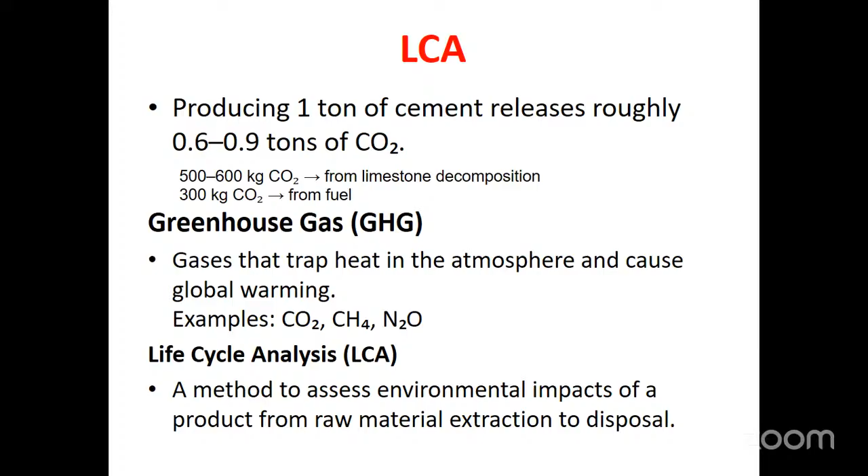So specific to life cycle analysis, this is the method to assess the environmental impact of a product from raw material extraction to disposal. So life cycle analysis is a broad term, but it has connectivity with many sub-terminologies, right from greenhouse gases and different stages of any construction, and how we measure the emission based on the limitation and application, something like the GWP values.

So at this stage, everyone should know about the 3 terms called embodied carbon, upfront carbon, whole life carbon. Because one would like to measure or estimate the GWP values, there should be familiarity about the different stages involved.

In the construction process, right from the raw material extraction till the possibility of utilizing the disposal case, the building, to the new product. I will show this in a later stage with slides, but these three terminologies one should be able to understand.

There are some material-related emissions possible for the material whatever we are using, before construction or after construction, whatever it is, and that is called embodied carbon.

And upfront carbon, it is specific to the emissions before use of the particular structure or building.

And the whole life carbon, it is the total emissions considered for the entire life cycle of the building, right from the raw material extraction to the overall disposal.

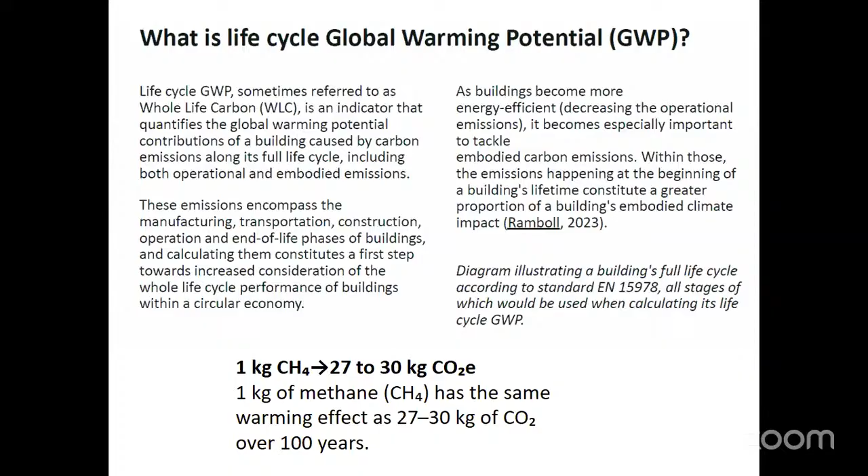With respect to CO2, we just measure the remaining, or whatever material you would like to measure the emission, to calculate the GWP values. So here, the emission factor, I can show in subsequent slides, becomes an important role here.

This is the area in which one can prove that the circular economy of the particular building is being satisfied after the successful recycling of the demolition material, for example, recycling of the concrete or recycling of steel or any other materials.

So what is the connectivity between this, our SDG, Sustainable Development Goals, and LCA, Life Cycle Assessment? There are 4 goals I am able to connect to it.

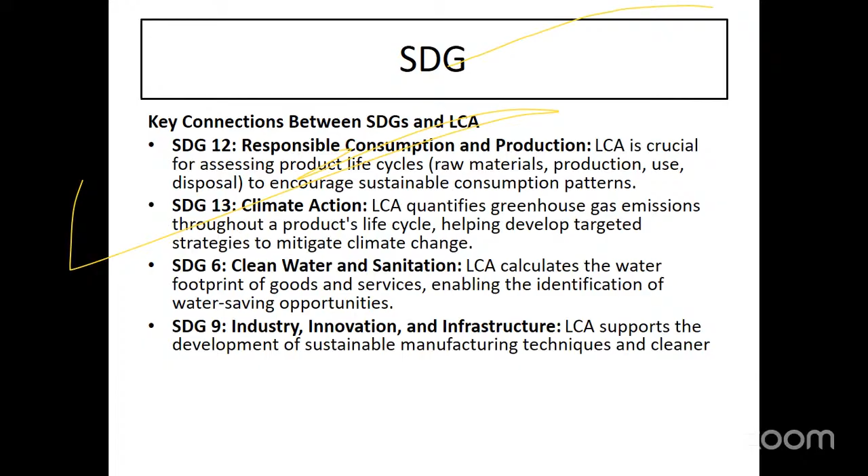And whatever I have shown here, the same SDG connects to this entire process. The overall life cycle assessment, as earlier explained, starts right from resource extraction to material processing. But according to your interest or practice, this process can be modified a little extra, and it can be fine-tuned with subdivisions also. It is not only specific to concrete alone - there is transportation, use, end of life, and again recycling.

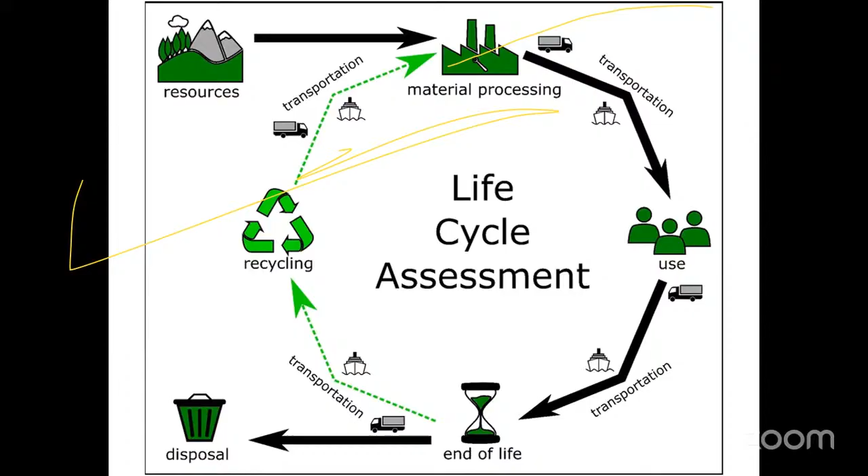So here, the building life cycle whatever I have shown, it can again be given in terms of embodied carbon. We have operational carbon, and again embodied carbon - completely the total, overall we call it whole life carbon.

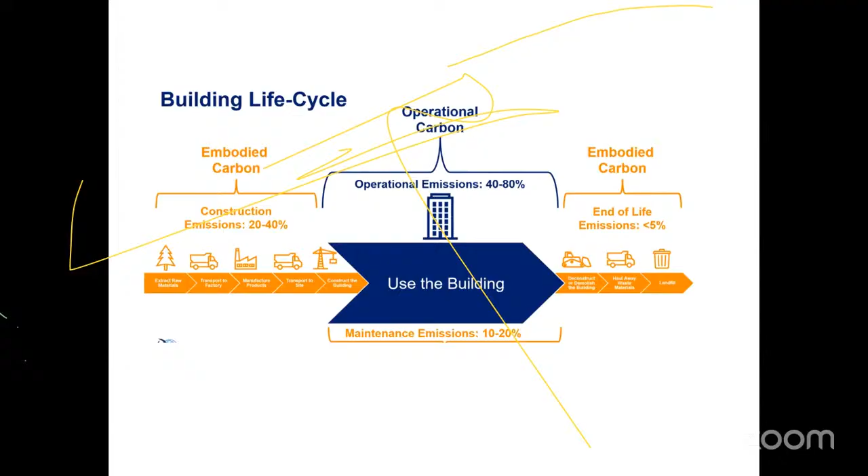So in this case, there is an important stage called the embodied carbon upfront stage, whatever I have told. It is around 20 to 40% emissions we can see. And in the operational carbon stage, the emissions - this is some approximate percentage only - however it ranges between 40 to 80%, including maintenance emissions of 10 to 20%. The end of life stage has less than 5%.

So before we move to the next terminologies, there are three types of terminologies I would like to introduce here. One is the cradle to cradle approach. So here, if someone is interested to go for a life cycle analysis process, there are three stages whatever we have already seen. It can again be connected with these three methodologies - the approach is cradle to gate type, cradle to grave, and cradle to cradle type.

Just remember the same methodology whatever we have seen earlier - the emission stages A1 to A3 come under the production stage. That emission stage is connected with the cradle to gate approach, because the particular product is being manufactured and delivered till the gate of the factory. So this cradle to gate approach is limitedly applicable till A1 to A3, and the carbon category coming under is upfront carbon emission, that's what we have seen earlier. What it represents exactly is the carbon emitted before leaving the factory, because it is not yet being utilized or in the use stage. An example in a concrete slab is the cement making process, aggregate processing, or batching, whatever it is.

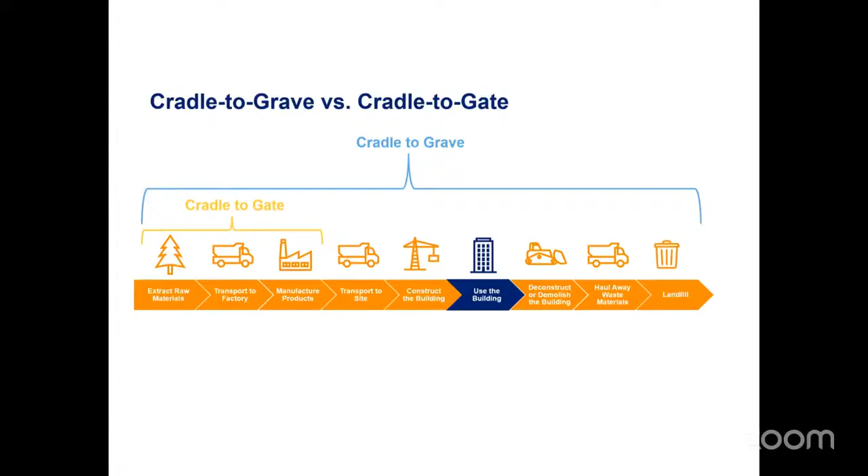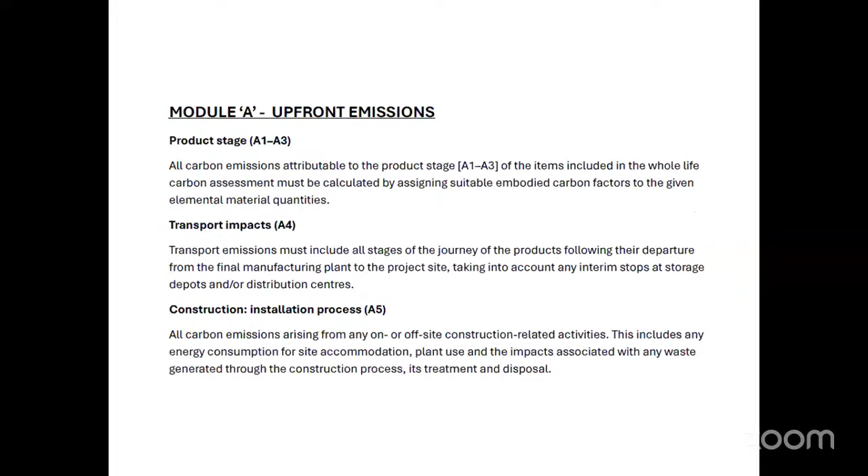So that's what is shown here as a cradle to gate approach, the first three processes, and starting from the end, it can be considered for cradle to grave approach. And once it is proven for recycling and remanufacturing or reuse, then it comes under the cradle to cradle approach. So this is the same definition we have already seen.

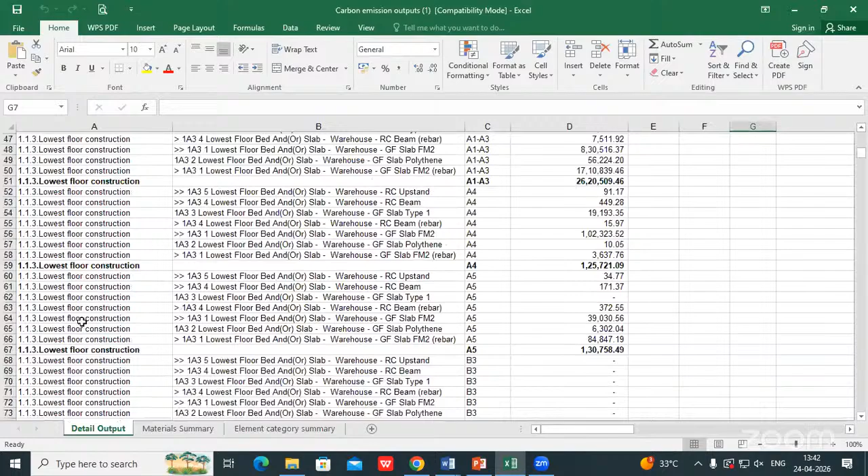For example, it consists of several foundations and floor constructions with many elements, which stage is being considered and the corresponding emission kgCO2 equivalent values. And this is the summary, maybe for an overall building, floor wise, element wise. We are able to see the different stages, what are the GWP values, right from A1 to C4. So it doesn't mean that all the elements or whatever particular description you have taken should contribute in all the stages. There are some applicable stages, and there are some non-applicable stages also. So the final outcome will be like this.

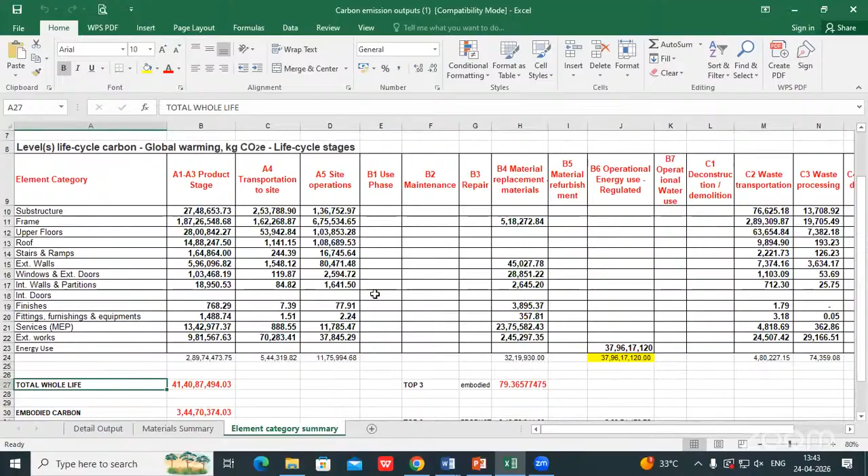Someone is calculating element category for a particular building. A1 to A3, what are all the GWP values element wise? It is inclusive of A4, A5. Here I am not interested in calculating B1, B2, B3, B5, B7 because they are not relevant from a civil engineering point of view. But anyway, it is the contribution of many engineering professionals. So once it is calculated, then we are able to categorize it according to our requirement, because we have got the split up of stages like total whole life carbon also.

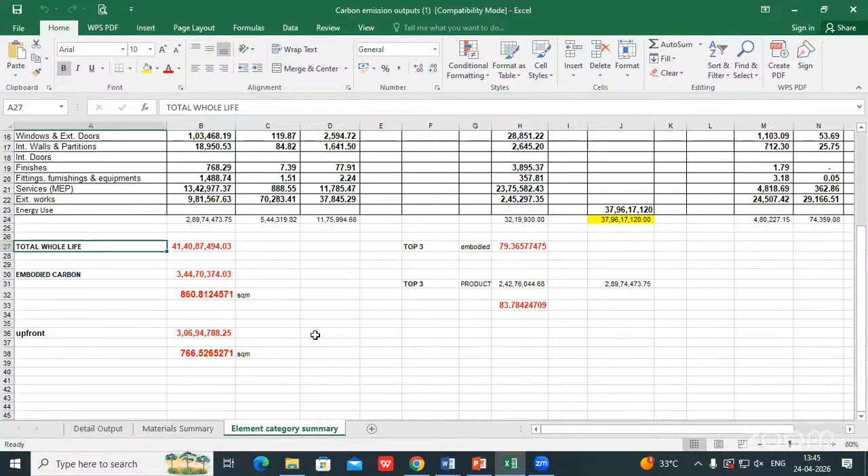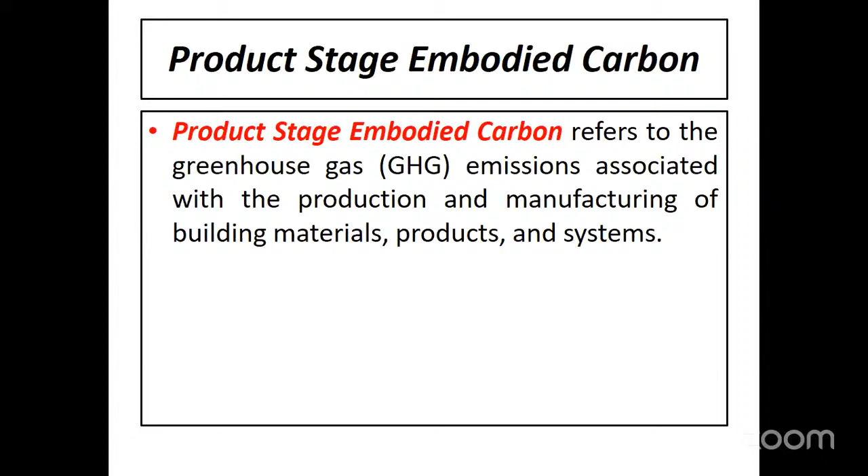So that we can work in stage D or for further improvement. So this breakup will be helpful to analyze the exact effect of GWP on the product efficiency. A product system or process throughout its entire life cycle. So for the majority of people, the outcome is the whole life global warming potential because it starts from the raw material extraction to end of life, and the whole life embodied carbon, that's what I have already explained, and product stage also explained, and upfront.

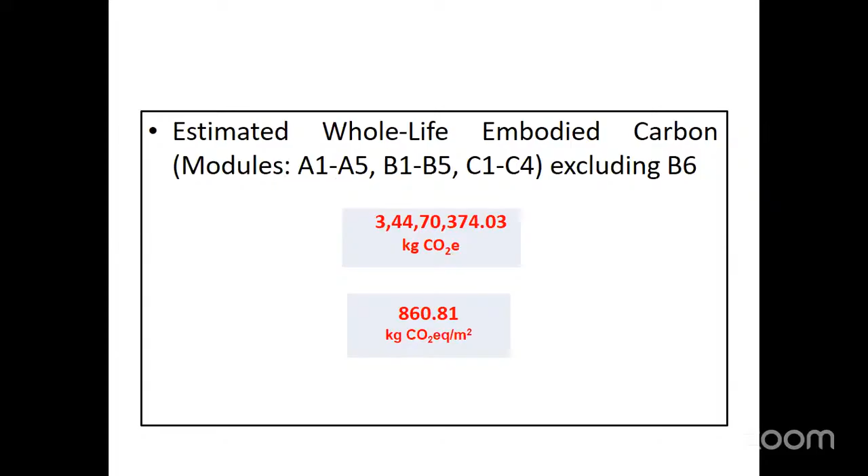So here I am giving the answer for whole life. For example, the final outcome value will be like this because it is inclusive of the stages A1 to A5, B1 to B5, and C1 to C4. The estimated whole life embodied carbon, excluding B6, is this much GWP, and if I divide by floor area, this much kg CO2 equivalent per square meter. And now we are able to compare the contribution, what I said, based on material point of view emission or process point of view emission or operation related. So we are able to compare the percentages also.

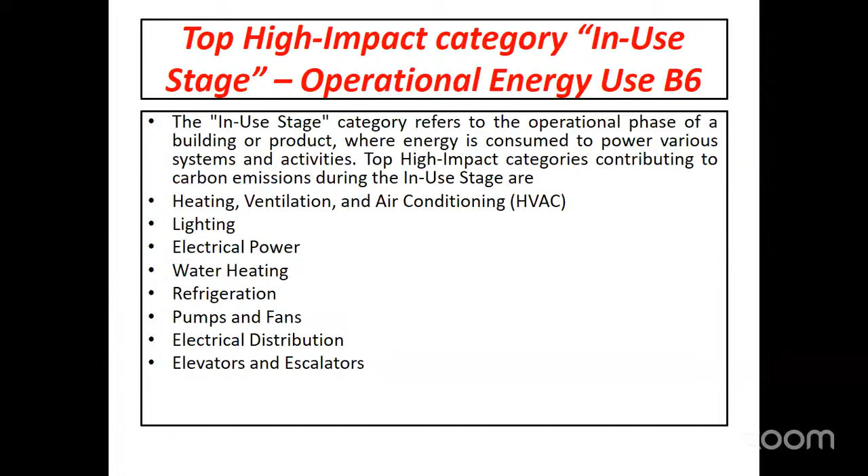But this B6 stage is the top high impact category in the use stage. The operational energy and operational water come under the use stage. And these are all the exact issues like heating, ventilation, and air conditioning, lighting, water heating, refrigeration, pumps and fans. Industrial buildings and commercial buildings may have a lot of impact in this stage.

So another particular terminology one should be able to understand is environmental product declaration, because to calculate GWP value, definitely we need this emission factor, because the emission factor is going to vary because there are a lot of dependent parameters in emission factors. The emission factors are changing product to product. One can calculate the emission factor with our own understanding also, or it can be referred from any literature, or there are a lot of guidelines available. There are some standards also available. There are many softwares also giving these EPD values.

This is a standardized and independently verified document that reports environmental impact. Nowadays a lot of manufacturers are giving this emission factor value so that we can understand what is the exact sustainability of that product. It's based on principles of the International Organization for Standardization. And what does this EPD include? It is a data sheet. It has got raw material extraction, water consumption, emissions data, waste generation, and end of life disposal or recycling details.

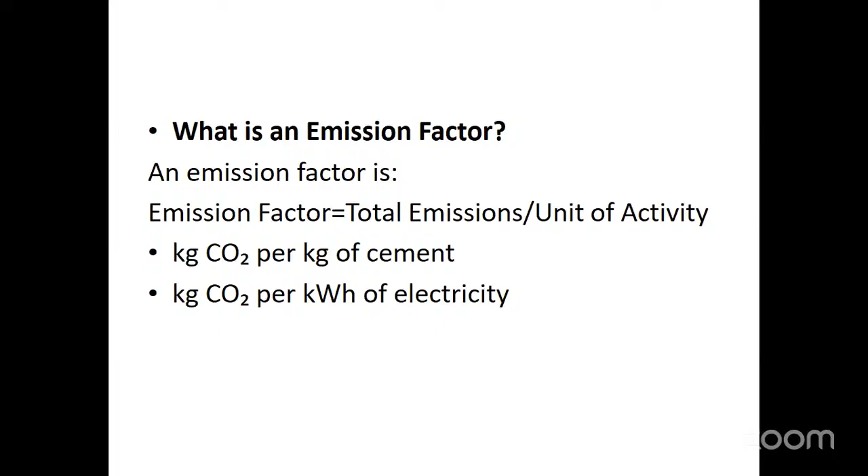So what is an emission factor? This emission factor is calculated using the basic formula: total emissions divided by the unit of activity. For example, for a concrete engineer, simple to understand, someone interested in GWP calculation, the unit is kg CO2 per kg of cement. And if it is electricity related emissions, then we say kg CO2 per kilowatt hour. Transport related emissions are also available. For example, fuel-based emission factors are used for fuel, because in all the raw material extraction and transportation processes, we have the utilization of diesel or any other fossil fuel.

So in case we use diesel or petrol, whatever it is, the kg CO2 per liter value is 2.6 to 2.7. And how it is being utilized in GWP calculation, you can see in the coming slides. And the electricity emission factor is also equally important. It depends on how electricity is being generated, whether it is coal-based or renewable-based. So here the value will be like 0.7 to 0.9. These are all some samples; it is going to vary based on the specific type of project and dependent parameters.

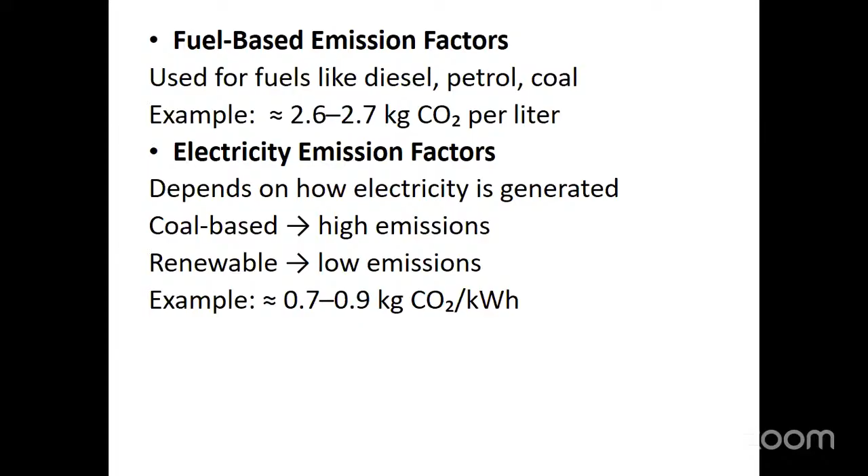Example for material-based emission factors: cement 0.8 to 0.9 kg CO2 per kg, but it is not a constant value. If I am using ordinary Portland cement, it is different. Slag-based cement may be different, pozzolanic added cement, PPC, will be different, or geopolymer-based cement will be different. For steel and concrete, the values are like this. In case of concrete production, for example, I have a cement emission factor with OPC value 0.9 kg CO2 per kg of cement. In case I'm going to use M20 concrete with 300 kg, then the final value will be 270 kg CO2 equivalent.

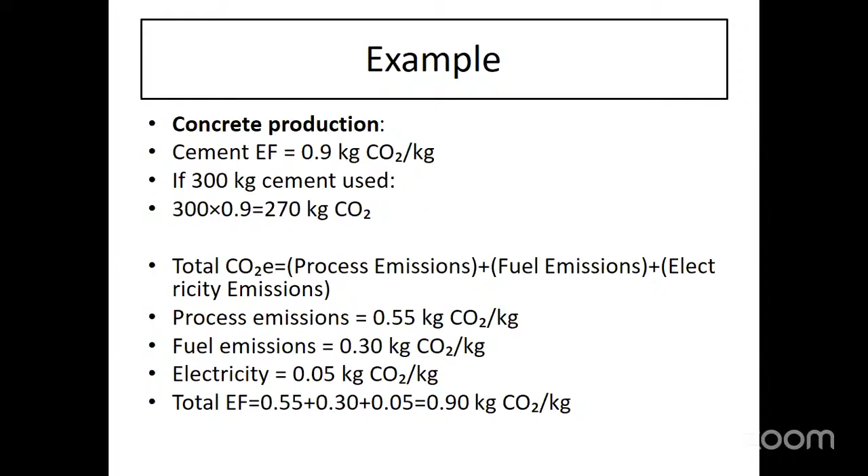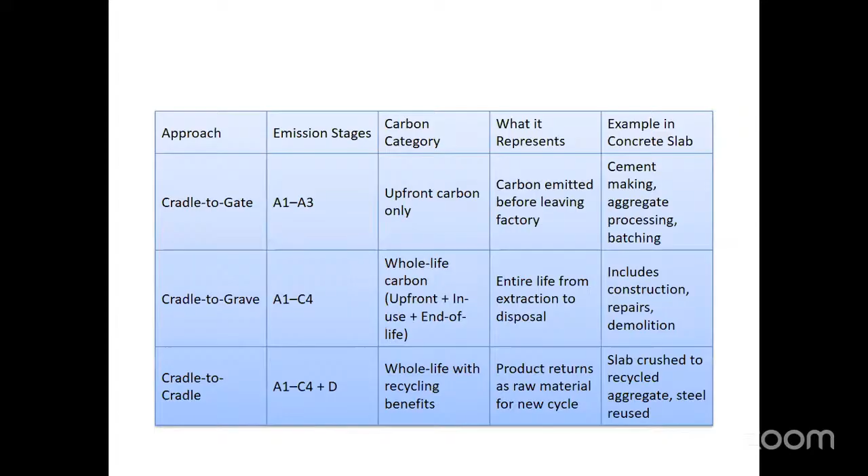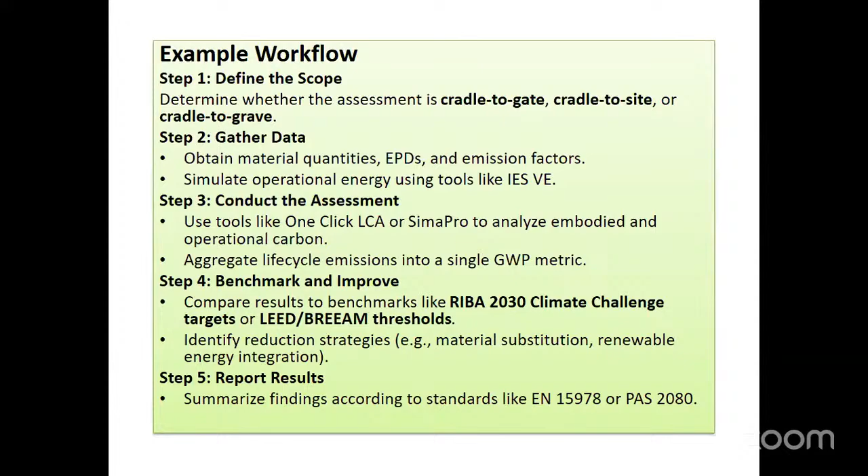So the total carbon emission is the combination of process, fuel, and electricity. Altogether it will be added and used for the analysis. These are some of the standards and methodologies that can be referred, related to ISO standards, to know about frameworks of LCA, environmental performance and energy management. So to perform this cradle to gate, cradle to grave or cradle to cradle approach, there are a lot of open source softwares available with some limitations. Like One Click LCA, it is the famous software, and a lot of analyses are done with it, because the advantage is the emission factors for different products, the EPD values, are inbuilt. Some of the softwares we have.

So here, what is the connectivity with climate impact of buildings, specifically for civil engineering? Buildings contribute 30 to 40% of global CO2 emissions. So that is the major factor here. And concrete is the major contributor due to cement production. So that's what we are specifically interested in: concrete, steel, brick, their utilization and the relevant product as well as process till the end of life. Other than that, you have the remaining operations like mechanical, electrical, plumbing, and other operational carbon emission related activities. So finally, it is high embodied and operational carbon.

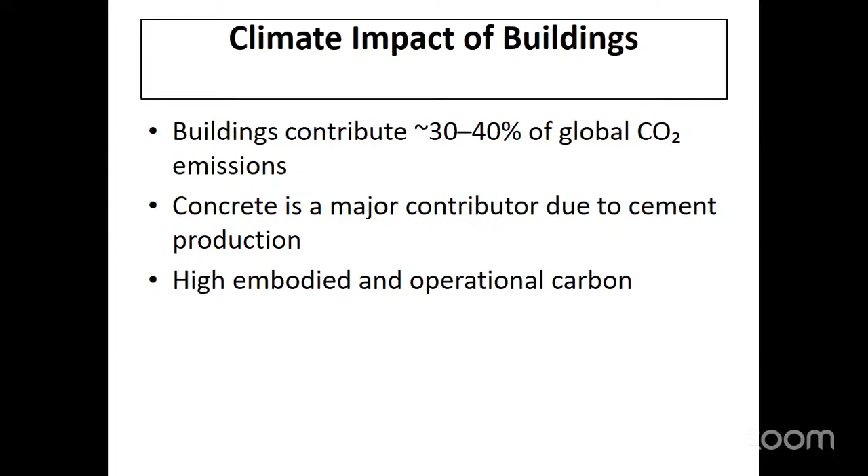So finally, how to improve LCA through material and construction methods. That is going to be important, because this is again connected with IGBC certifications and getting a rating for a particular building. So the first one is sustainable materials. Everyone knows a lot of researchers study the possibility of using recycled materials and choosing low carbon materials, because the Indian standard IS 456 is being revised, and soon we are going to get the new 456 emphasizing durability related designs and using low carbon materials, with utilization of slag based cement, and we started using almost 50% slag replacement.

The revised IS 10262 gives the optimum content also, and utilization of pozzolanic based cements also, using geopolymer concrete for precast products. So like that, this process can be better enhanced. So preferable renewable resources, locally sourced material also will be contributing.

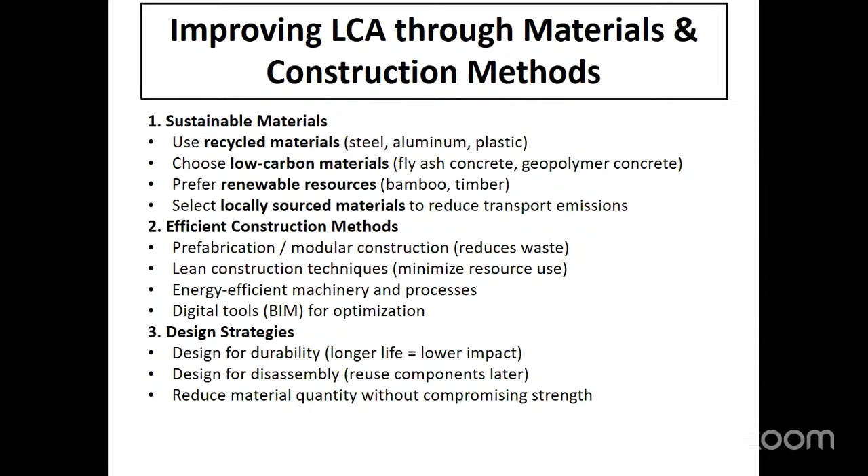Because if I don't use the appropriate grade of concrete for the particular exposure condition, I'm not able to plan the water cement ratio, minimum cement content, then cover. So like that, a lot of interrelated parameters are directly connected with design for durability, then we are missing certain things in enhancing the life cycle assessment process.

And exactly speaking to SDG 12 and 13, the exact problem is utilization of OPC and natural aggregates, resulting in embodied carbon and limited recycling. Mainly the clinker: the higher the utilization of clinker, the higher the emission, and this can be overcome by these low carbon materials, recycled materials, and efficient design.

How exactly is SDG 6 connected? The problem is excessive freshwater use, conventional curing methods, untreated wastewater discharge. I hope the revised guidelines in IS 456 prefer treated sewage water based on CPCB guidelines. If it is certified, you can use it for curing and preparing the concrete.

So here the improvement is water efficient concrete, like use of appropriate admixture to reduce water demand, and optimum mix design. And alternative water resources like recycled or treated water.

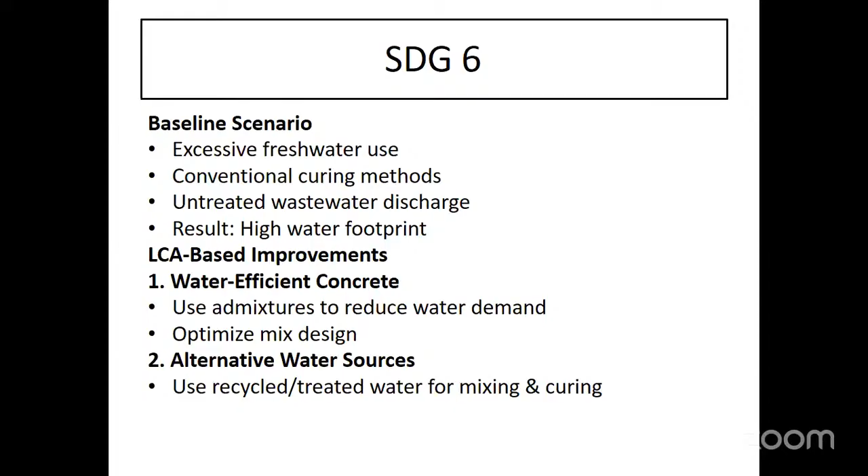How exactly is SDG 9 connected here? It is the conventional construction practices. As I said earlier, avoid plastering or use the precast method. These are all going to be the future trends, like using advanced materials. So the combination of pre-stressed precast with high strength concrete is nowadays preferable, and self-compacting concrete and geopolymer concrete.

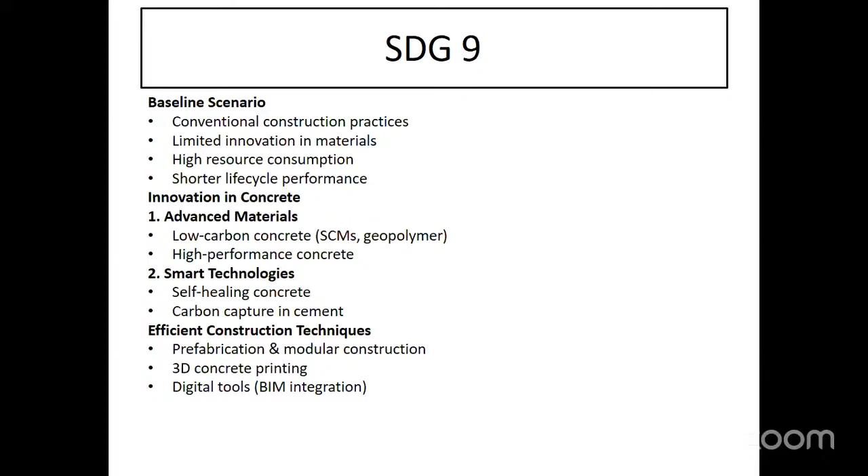There are some smart technologies to improve the performance by some innovation for a particular building, like a green building and smart building. Where possible, people can use 3D materials, nano materials also, wherever needed. Some small efforts can make some bigger changes in this life cycle enhancement.

And for conclusion, some points I would like to cover here. It is deemed to satisfy rules. Those who are familiar with the deemed to satisfy rules know they are governed in many guidelines, many code books. For example, in IS, the deemed to satisfy rules related to durability range from cover, minimum grade of concrete, minimum cover, maximum cover, as well as minimum reinforcement, maximum reinforcement, minimum cement and maximum cement, admixture utilizations, and optimum water cement ratios.

If someone is familiar and good enough to practice this, then the deemed to satisfy rules are covered and better sustainability can be achieved. So that will be the biggest advantage, and it is going to contribute in the production stage, the use stage, as well as the end stage. And it is followed by design for durability norms. That's what I have mentioned here.

And ultimately, by following this, there will be no corrosion. For example, in India, if we take most buildings, there is corrosion because the deemed to satisfy rules are not being followed.

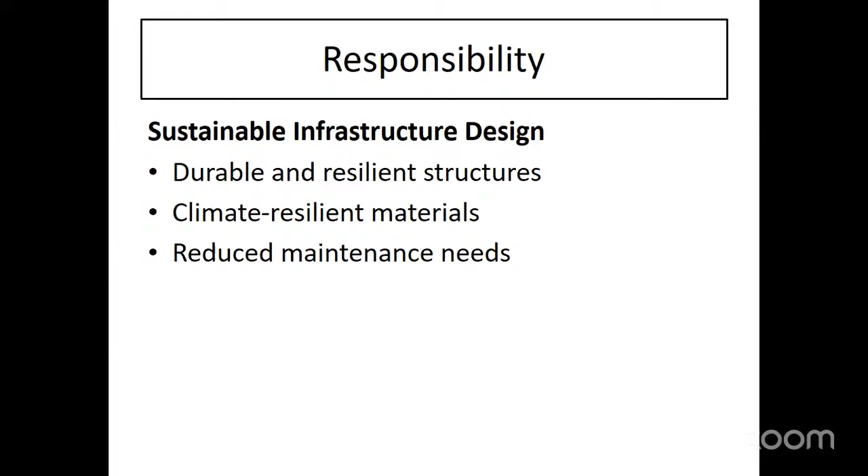This itself is contributing to the Indian economy, because there is a lot of insufficient planning, construction and design—a lot of corroded buildings. Randomly we can see this in public, residential, and commercial buildings. There are many reasons behind this that can be discussed under some other title. We can see corrosion cracks, and if we cut any bar, there is insufficient yield strength—so there is a lack of life.

If the building has to survive for at least 70 years, during 30 to 40 years in between we should be in the stage of repair and rehabilitation. The reasons may be many—carbonation, chlorination, or improper waterproofing, whatever it may be.

This is the case study, exactly connected with life cycle assessment. You cannot directly go for life cycle assessment unless you know the reality of the building—how it is designed and how it performs. Then you cannot directly incorporate a particular case with life cycle assessment.

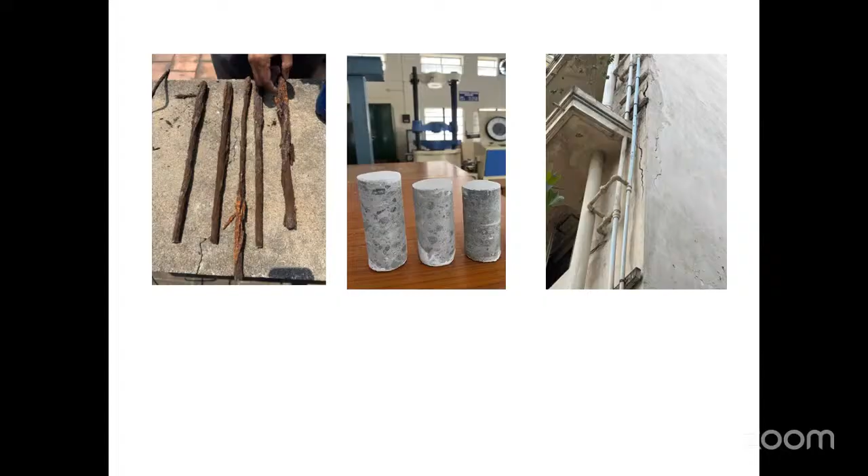So here are the exact problems I would like to show. In most of the roofs we see dummy columns—there is no proper structural concrete. The reinforcement starts from here.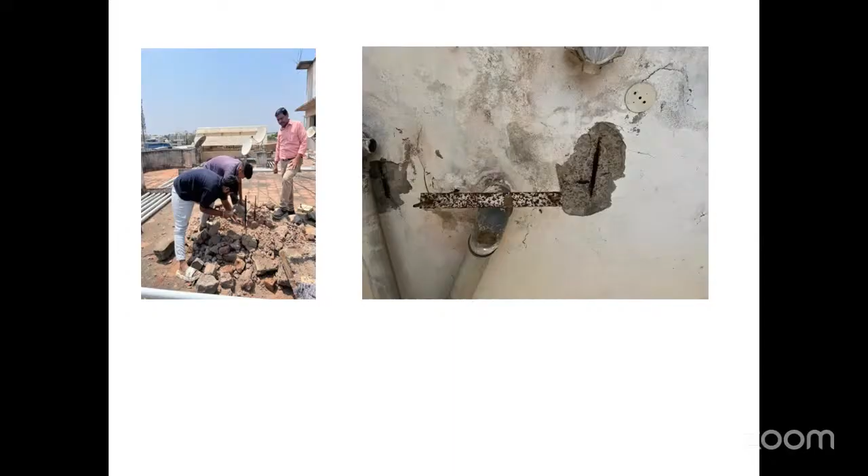There is a possibility of going for geopolymer concrete and a no-clinker concept, at least for small buildings, wherever possible. So we could construct a geopolymer-based cementless concrete block with the CSR fund, which I would like to show here. These are some introductory thoughts—if you have any clarifications.

I hope I am audible, right? Yes, sir.

So I have some questions here, so people can answer, just to refresh you on whatever we have seen. It will just take 5 minutes, based on the slides I have prepared.

Can LCA be used to assess environmental impacts of building retrofits? Any specific answers? So here the LCA can account for emissions during renovation and refurbishment also.

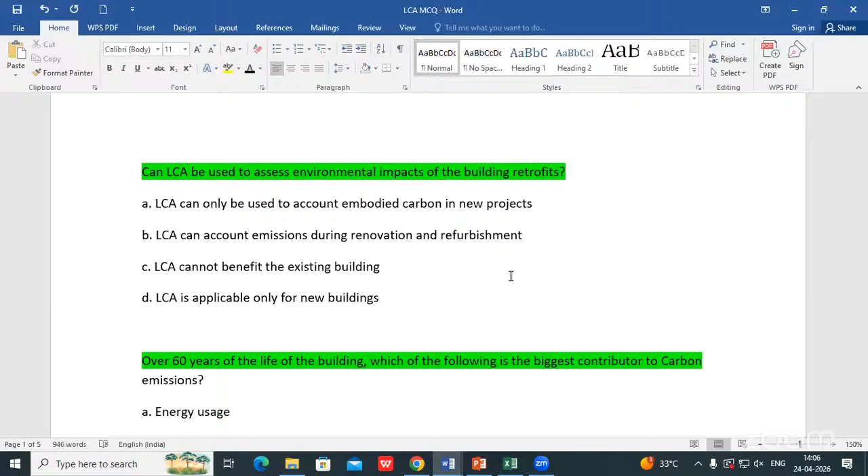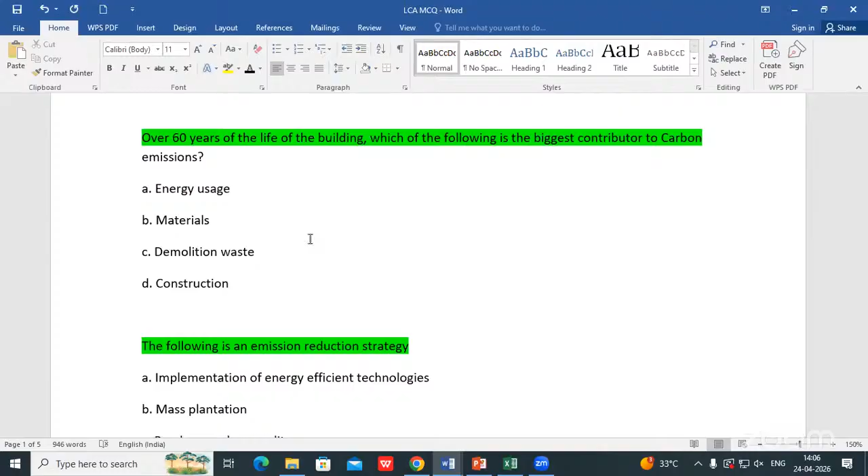Over 60 years of a building's life, which of the following is the biggest contributor to carbon emission? Energy usage—yes, energy usage. So though we are mostly concentrating on civil engineering based material, energy usage is going to be the biggest matter.

And the following is an emission reduction strategy, out of four. So the implementation of energy efficient technologies contributes more here.

The following is an approach to reduce environmental impact during construction. Because the IGBC guidelines are connected here—use of local materials, it is very good. You need not always plan for clay brick; the immediate mindset may be clay brick, but we have alternate types of bricks also.

Which of the following standards cover LCA studies and LCI studies? So ISO 14040—it is a very good ISO standard.

And which of the following are included as the upfront embodied carbon in a building's life? I have told earlier only about upfront embodied carbon—it is manufacturing, transportation of products, and construction.

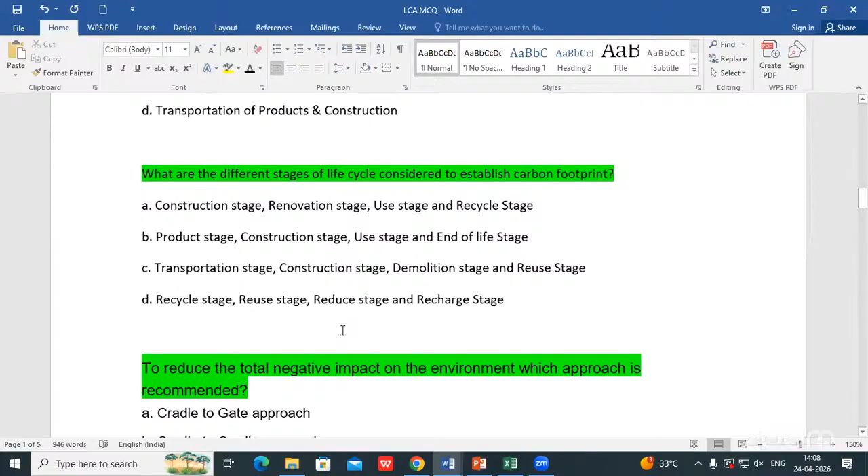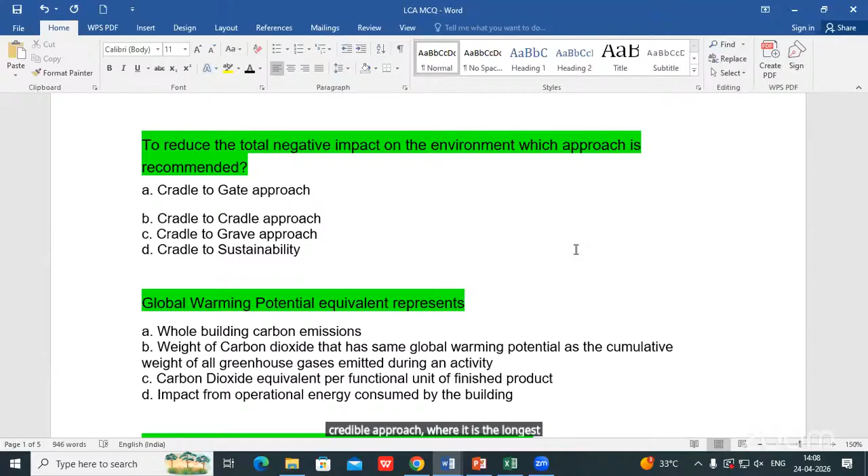To reduce the total negative impact on the environment, which approach is recommended? So cradle to cradle approach—that is the longest cycle, in which you have to work for a better recycling product.

Then, what does global warming potential equivalent actually represent? It is the weight of carbon dioxide that has the same global warming potential as the cumulative weight of greenhouse gases emitted during an activity. So that is B.

A unit of kg carbon dioxide per kg emission is used to express exactly the material emission, so carbon emissions.

Which of the following is not a part of India's commitment at COP 26? You can refer this. This is interesting: by 2030, 50% of the energy requirement by renewable sources. We'll see whether it can be achieved.

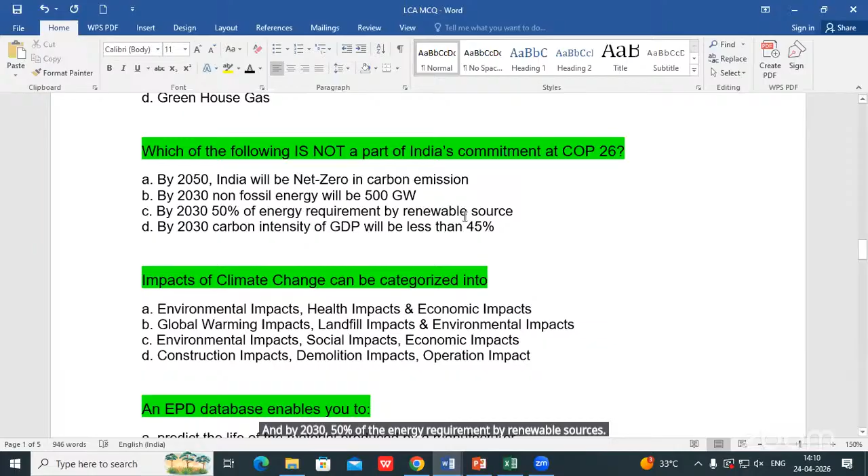The impacts of climate change can be categorized into environment impacts, health impacts, and economic impacts.

An EPD database enables you to access the LCA data of a specific material produced by a specific manufacturer.

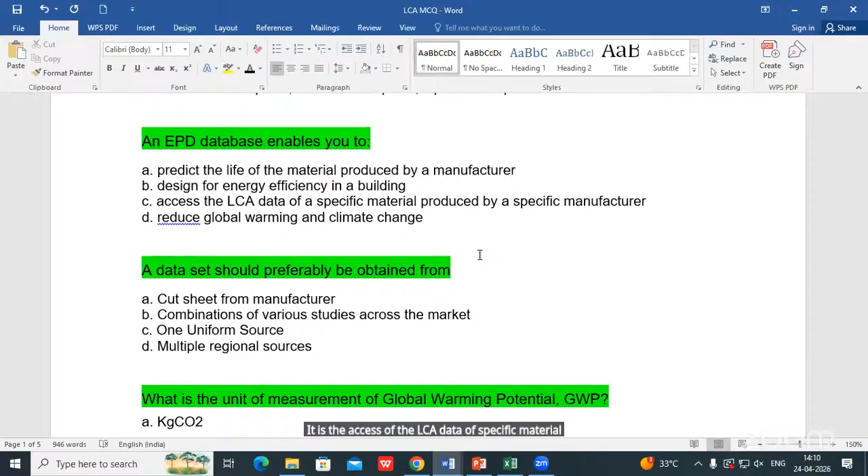A data set should preferably be obtained from one uniform source so that your result will be acceptable.

What is the unit of measurement for global warming potential? What does it denote? It is kg CO2 equivalent.

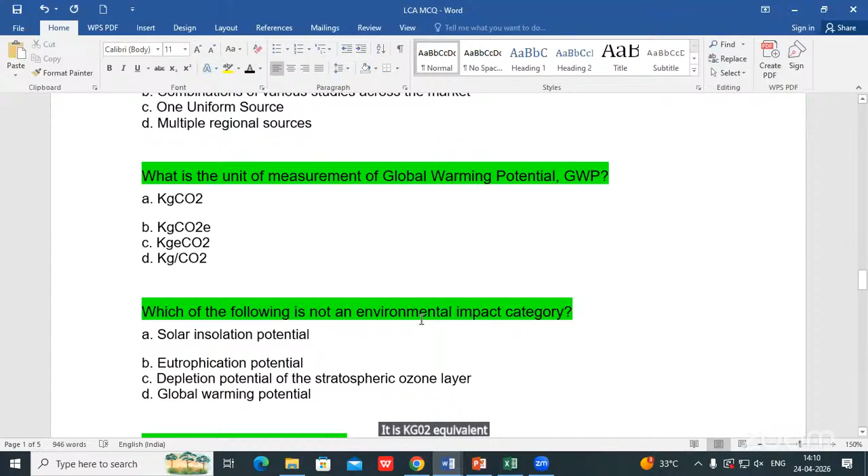LCA study can be adopted to create discipline in the design approach.

Embodied carbon is the result of demolition of buildings and recycling of materials.

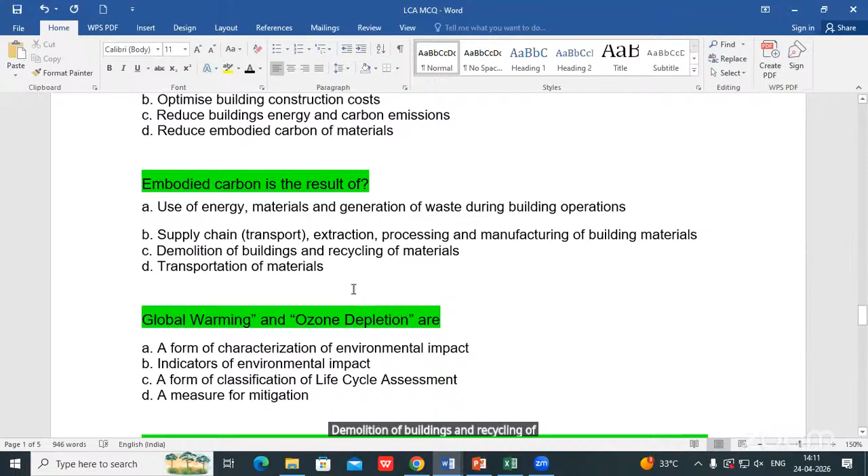Global warming and ozone depletion are indicators of environmental impact.

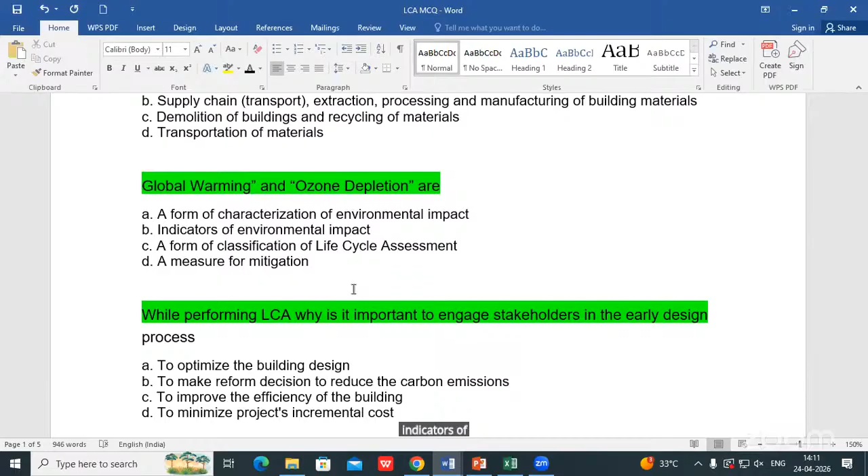While performing LCA, why is it important to engage stakeholders in the early design process? Because it is important to work all together as a team, right from architect to construction engineer, as you have to optimize the building design.

Which of the following measures can help cut buildings' embodied carbon? Only the embodied carbon—which measure will be helpful? Use low carbon structural materials and sustainable products as much as possible.

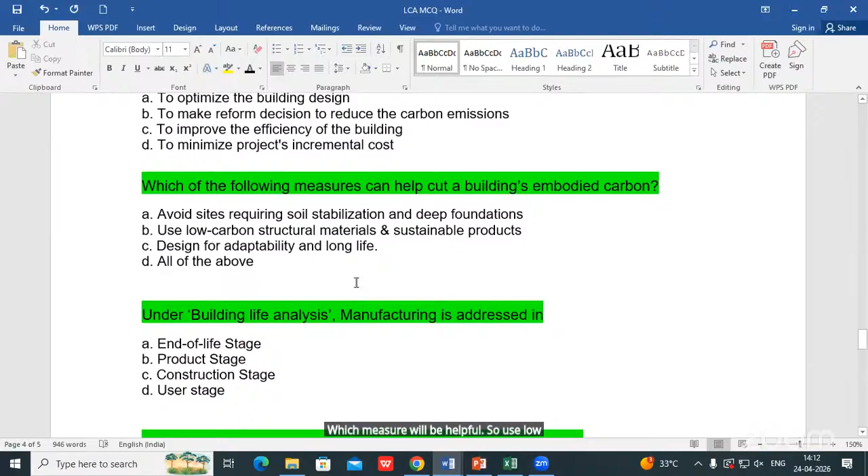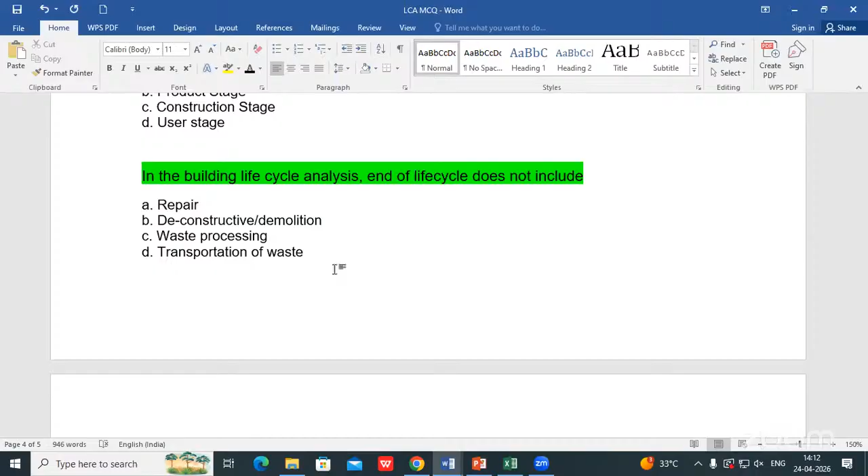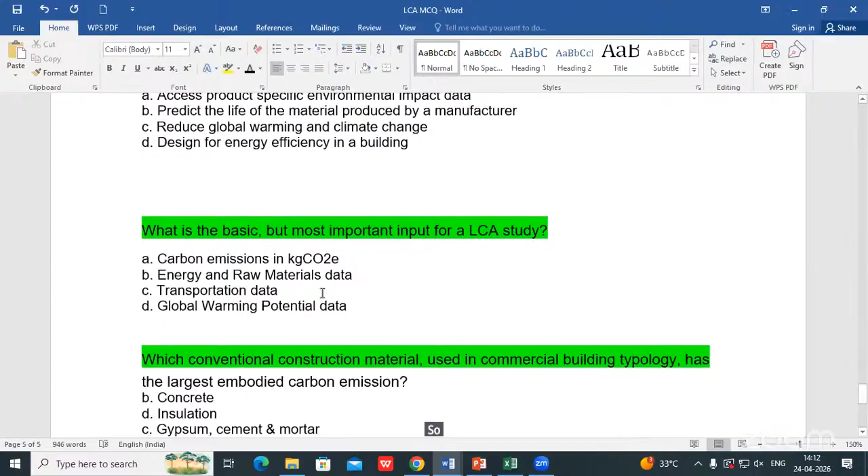Hello, sir. Yes, do you have any clarifications?

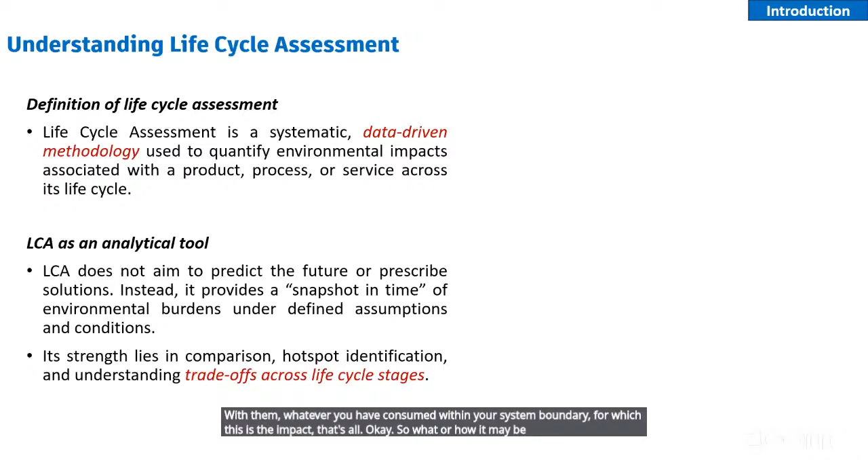So how is LCA helpful? It will be very helpful in trade-offs across the life cycle stages. So what is meant by trade-off? We have life cycle stages, everybody knows the typical life cycle stages for LCA assessment.

We have raw material extraction as a stage, production as a stage, packaging distribution as a stage, downstream logistics as a stage, use and maintenance, and finally disposal, and thereafter some recycling. So everything is individual stages.

When you perform LCA covering all these things, you would understand where you can really react or where you cannot react. For example, take distribution, downstream transportation. In life cycle modules, it is called A4, downstream distribution. The downstream distribution is not in your control.

You cannot change anything there, but you understand the downstream impact comes around 300 kg CO2 equivalent as global warming potential. I understand that's a very big number, but I cannot react there. Whereas I can look into other areas. Let the downstream transportation be the hotspot, but let me focus on other areas because in that hotspot I don't have control.

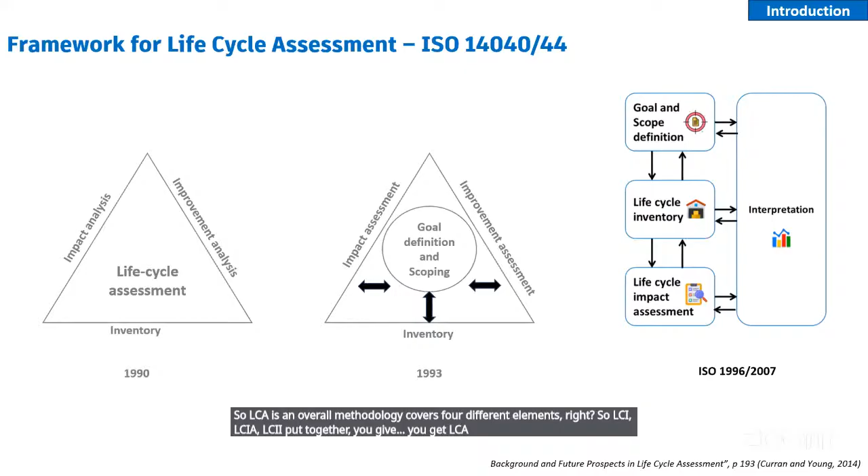Since 1996, then amended in 2007, since then till now - and I can say forever hereafter - this is the same framework which is going to exist for LCA.

As a consultant or practitioner who wants to perform LCA, you just need to learn what is given in ISO 14040. That's a document of some 11 to 15 pages. After reading that, you would understand what these 4 stages really indicate. That is the prerequisite.

Once you read this, you need to go into the detailed guidelines given by ISO 14044. That will be around 80 pages document.

If you want to kickstart your LCA journey, no matter if you are a student, research scholar, or faculty - because I am very much aware that these days, no matter to whichever journal you want to submit your article, they want you to perform LCA, any authorized environmental assessment. So LCA is inevitable for all stakeholders.

So learn these two documents. 14040 you cannot pirate from the internet. But 14044, the Indian government has launched its own version, available on Google for free. Please take that 14044, download it, take a printout, and read it.

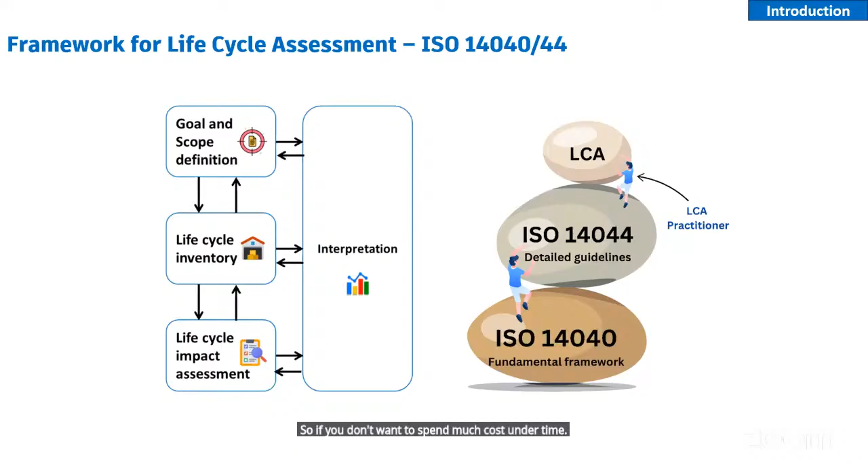So impact measurement - when we say impact measurement, we have approaches or perspectives. Especially belonging to a construction profession, we have certain classifications which don't apply to any other sector. If you belong to electrical, electronics, or any other production sector, you don't have this kind of classification. But since you belong to construction or civil, you should know about these perspectives.

So first, we have the perspective of measurement of impact, either on the basis of carbon or on the basis of a full set of environmental spectrum. When we say carbon footprint as an impact measurement, it will be about only a single indicator, GWP. It will answer how much this contributes to climate change, that's all.

So what standards are available? ISO 14067, GHG Protocol, and PAS 2050. They are very fast - you can find lots of free and open source online tools, called carbon calculators, and make use of them. The result of carbon footprint will pave the path for your full level LCA. So that's your entry level.

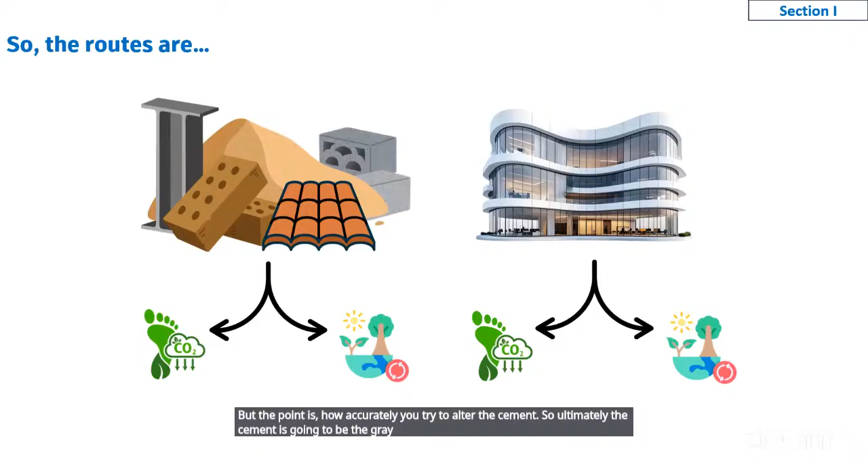So cement we cannot leave out because we need cement. But the point is how accurately you try to alter the cement. Ultimately the cement is going to be gray - when we say gray, it holds both goodness and it also has its own badness. So it is going to be gray anyway, but people will not give up.

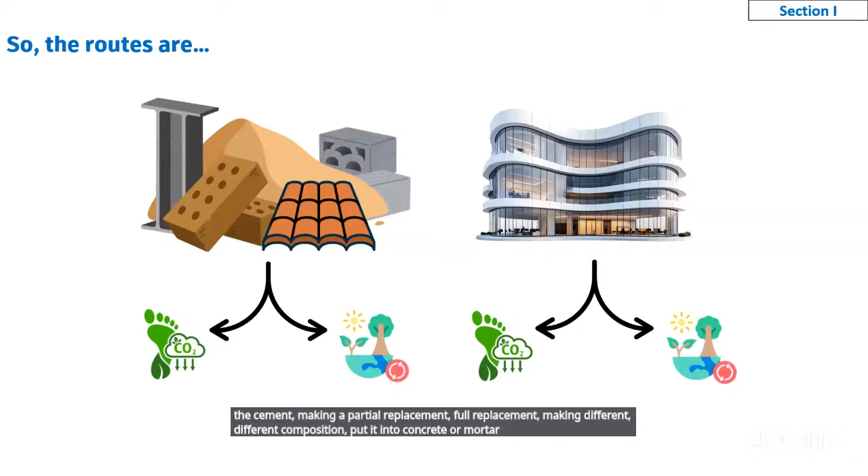So they will keep on putting something into the cement, making a partial replacement, full replacement, making different compositions, putting it into concrete or mortar or any other product, and testing it for the standard wise requirement. So by that way, we will never give up on cement.

But the point is, how much is left on the earth's surface as the sources of cement. So when you go deeper down, what is cement made up of as a product? Again, some clay and sand and some processes. So as long as you have clay, as long as you have sand, you may continue the production of cement. Okay, how far? Up to 2,250.

So till then, people will keep on playing with the cement and concrete continuously. And the market will not stop for any of your experiment. Market will keep on running. So that only nobody cares about what this particular research is all about.

Okay, we are a concrete producer or a cement producer. Let us wait for this group of researchers who is working in one corner of the world. They may come up with the alternative for cement. No such manufacturer of cement will wait for it. They will keep on producing cement. They will keep on producing concrete, and they will keep on enhancing the infrastructure.

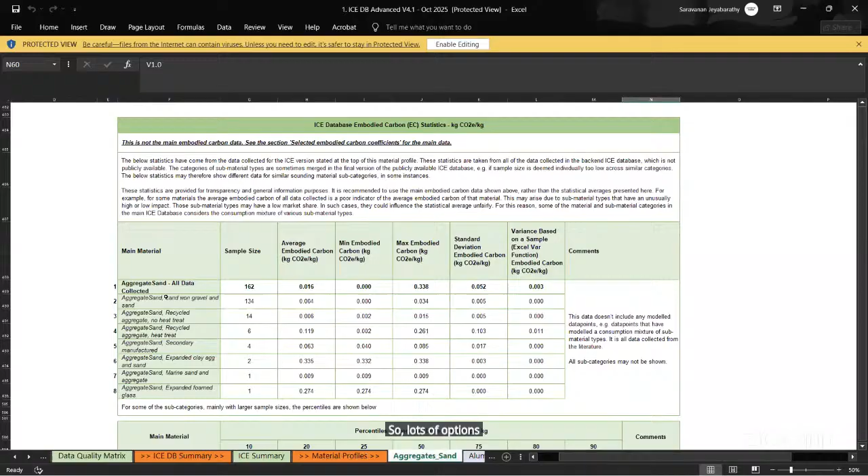So that's sand. Then aluminum, you can see aluminum as a product, with lots of divisions and different values. Then asphalt and asphalt-related products, bitumen, and very importantly, cements and mortar, because we are always fond of cement. Different classes of cement, types of cement, everything. Now you may wonder, sir, I want fly ash based cement. That also would be available. You can explore this sheet.

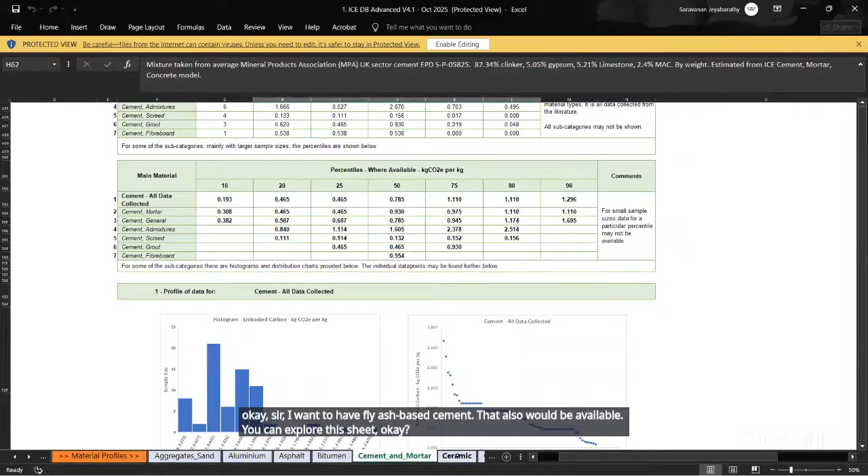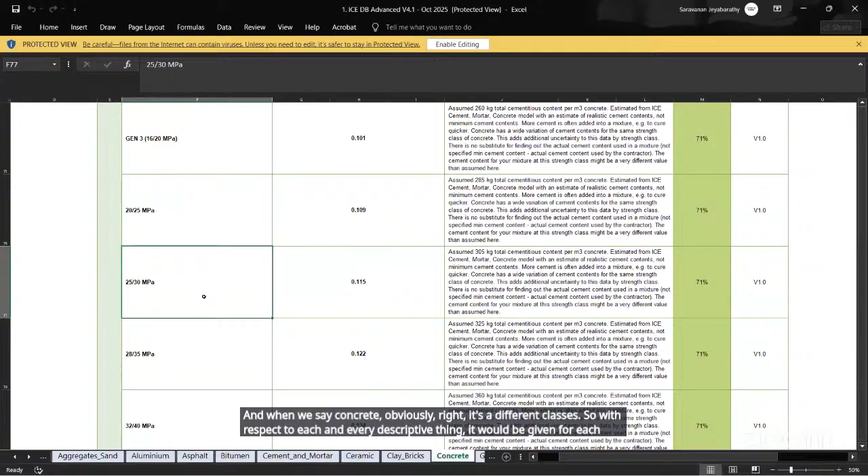Then you have ceramic, you have clay bricks and concrete exclusively, right? Concrete. And when we say concrete, obviously, it's different classes. So with respect to each and every descriptive thing, for each strength-wise mix, the respective footprint will be available. So how can you directly make use of this?

You would have already calculated your mix proportion. And for that mix proportion, you will have the value: cement this much quantity, sand, water, everything. And for each of that material, take this per kg carbon factor from this and multiply with your quantity. That is your carbon footprint. And when you sum up all the values, that is the total carbon footprint of your concrete mix.

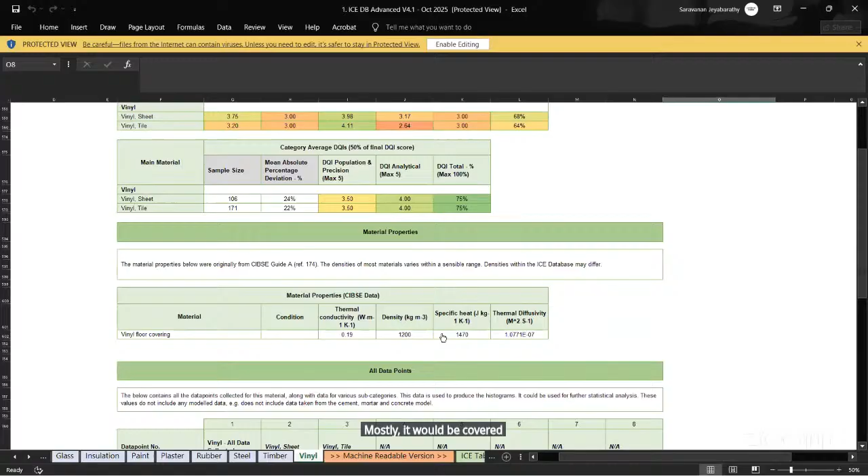So likewise, whatever building materials you want to consider, you can calculate the embodied carbon values here. Glass, insulation materials, plaster, rubber, steel, timber, and I think some vinyl-based things. Mostly it would be covered when you just scroll down and see all the values in it. So that is your first tool, and it is a free one, so please make use of it.

Next one is... Second one is Kaleidoscope. You can Google it as Kaleidoscope embodied carbon. It will show up like this. And what is the highlight of this? This will provide you embodied carbon for the different components of a building. So it can be envelope, insulation, partition, wall, ceiling, flooring, like this.

So you can read the website. For example, let us take wall. When you click wall, you will have the option. Simply, you just need to select it. That's all. In parallel, it will calculate. So what is the impact you want to see? Only GWP or all the impacts? All the impacts will be coming: global warming, non-renewable, eutrophication, smog, acidification, ODP, everything. Then life cycle stage wise, material breakdown.

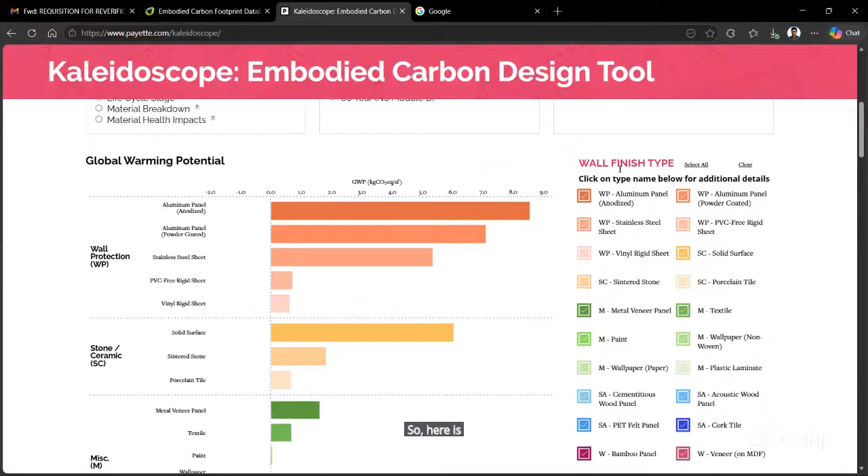So for example, the life cycle, lifespan also is available: 60 year and only module A. This is only embodied carbon, this is whole life carbon. That's the point. So here are the options, wall finish type. Let us just clear everything. Our choice, let us go with aluminum panel. And the description is available. You just check that.

So aluminum panel, wall protection. That is your GWP of aluminum panel: 8.55 kg CO2. That is the value that you need. Along with that aluminum panel, if you have a steel sheet, this is how it will get added. So it's up to your different combinations. You can simply make a small project: make some 5 different compositions and understand which is the lowest one, and try to understand why it is a lower one, so that you can understand the materials from a sustainability perspective.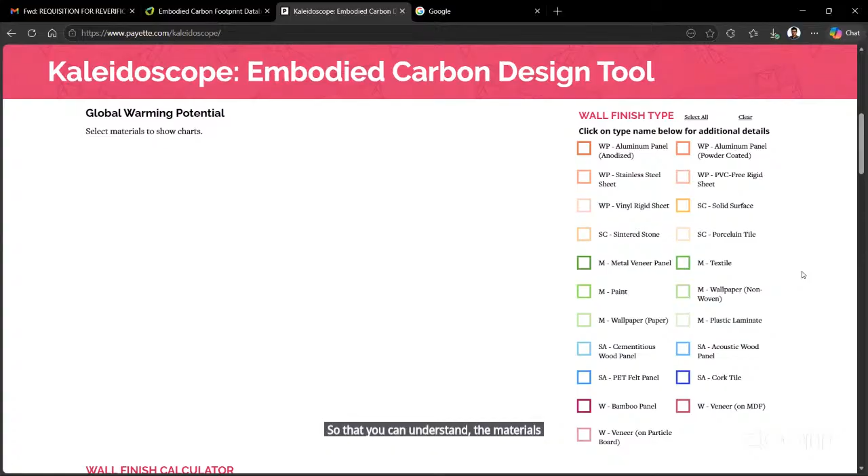So cementitious wood panel, a very big number? 13. No, it's not 13, it is 1.34. And also you should understand the unit of measurement, kg CO2 equivalent per square feet. So likewise, here it is. We have different options you can choose. Put the square foot value and the GWP will be automatically calculated.

And you can compare: 5 square feet, same 5 square feet, but 2 different materials. Can you see the difference? PVC-free rigid sheet and aluminum panel. That's the difference. Aluminum is the worst product. Against textile, it's almost equal, PVC-free rigid sheet against the textile product. So likewise, you can do a lot of modifications and understanding for a wall system.

And you can generate your option in the form of a PDF as well, and you can document and save it for your later reference. Similarly, you can do the same thing with different ceiling options and all. So that is your Kaleidoscope embodied carbon design tool. So what is the use of this, sir? You are simply selecting and seeing. What is the application?

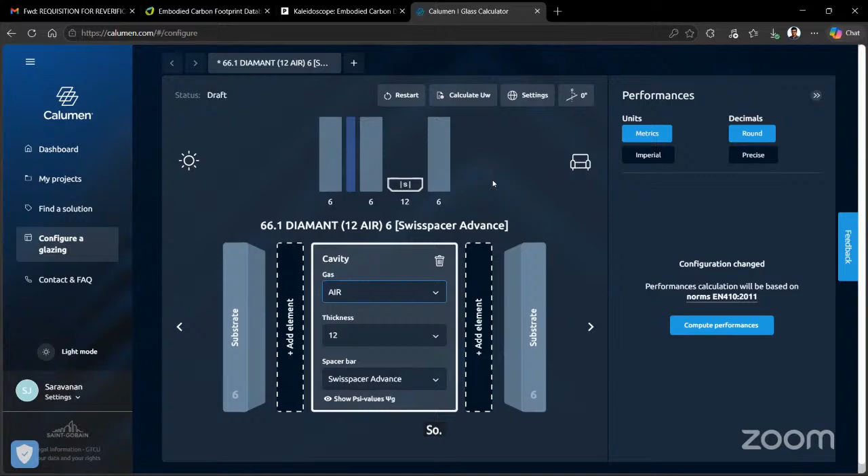Cavity. That cavity can be simply air or a specific gas, which has a different thermal ingress property, so that you will still receive the sunlight through the glazing, but not the heat.

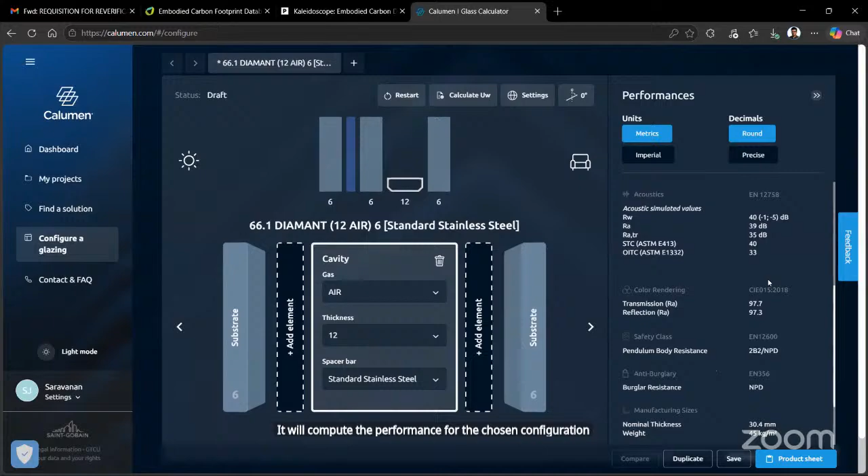Okay, so that is the different options you have, the cavity and different options available. So after choosing your number of things, on the right side you can see compute performance. When you click that, it will compute the performance for the chosen configuration. And at the bottom, you can see global warming potential A1 to A3, right? So here it is not available. I don't know why, you need to choose different values.

Sometimes for a weird kind of configuration, you are not able to see the value. So there, it's not available. Let me show it.

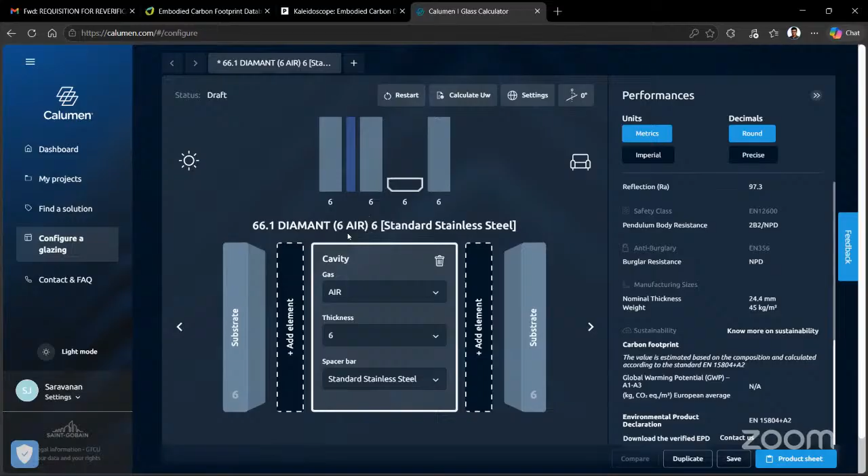Sometimes it happens, no issues. But this is where you can do trial and error for your glazing product selection, right? Okay, so it is not showing here. On the other hand, let me show here. Find a solution, here, find a solution. Find by performance. Yeah, sometimes the software will be down, but still we have another option.

Find a solution, you can click, and you can choose by country. Unfortunately, India is not there, but still, you can see from where the production or the import happens. So by default, it will choose the standard itself. So what is your building type? Office building. What kind of glazing you want to have? Double glazing or triple glazing? So if I choose triple glazing and click validate, it will show.

Okay. Solar production, standard, visual comfort, acoustics - okay, everything. But unfortunately, yes, okay, there are 3 options available. Discover proposals. Performance mode also you can adjust manually, right? But the standard thing is chosen. So 3 options are available, right?

So when you click that, all the three options will be listed here. So take note of the time. So three different models, right? Option 1, option 2, option 3. So you can do lots of statistical things here, and the respective configuration is mentioned here: outdoor, indoor, triple glazing we chose, right? So the model name will be there, and you can see download product sheet.

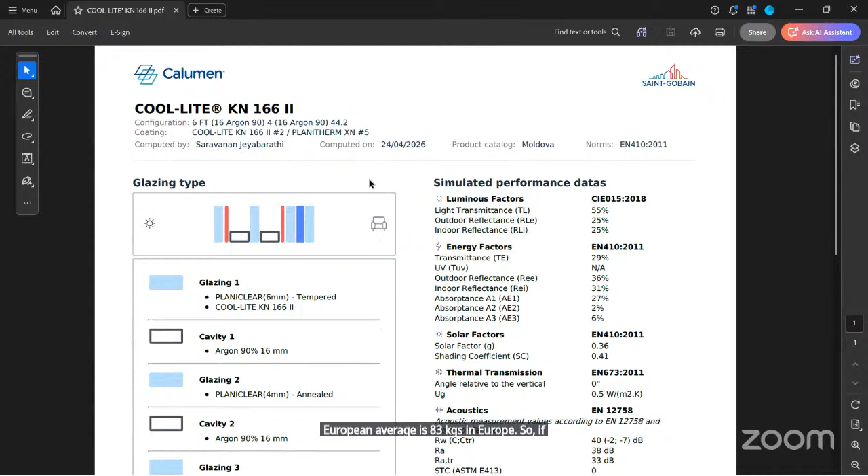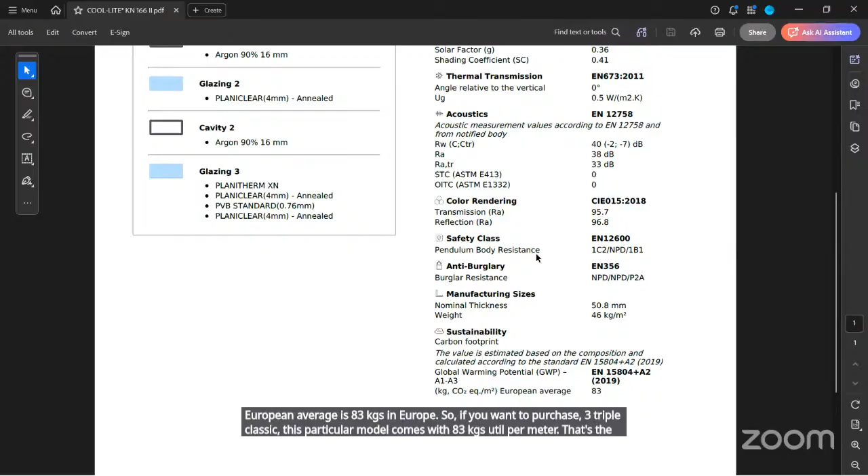You understand this is exclusively for the Saint-Gobain products alone. So when you download the product sheet, this is what comes out, and under sustainability you can see carbon footprint. European average is 83 kg CO2 equivalent. So if you want to purchase this particular triple glazing model, it comes with 83 kg CO2 equivalent per meter square. That's the thing, right? So like this, you can explore the different options in Saint-Gobain for your glazing solutions, and you can put your own configurator and ask for the respective model. Okay, this is the product we want. Like this, you can forward it to your procurement team, right?

So that is your Calumen. Then we have Open LCA, right? Open LCA is for product level life cycle assessment, a full life cycle assessment. So whatever we have seen so far is a carbon footprint measurement at product level. This is full environmental measurement for a product level. So when we say full environmental measurement for a product level, we have multiple options: Open LCA, SimaPro, GaBi, One Click LCA again, and Ecochain, Carbon Graph. Lots of products and software are available. Depends on the cost and depends on your preference, you can purchase on your own. For educational institutions, lots and lots of offers would be available from each provider. You can explore them, right?

For example, let me show you a quick model of a conventional brick and an eco brick. Okay, eco brick. So when we say conventional brick, lots of options are there. Eco brick, lots of options are there, right? But still, one particular combination we have here. Right? Eco brick, clay brick. Okay, so here's the clay brick. So I have split the clay brick into life cycle stages A1, A2, A3. I hope the screen is visible, right?

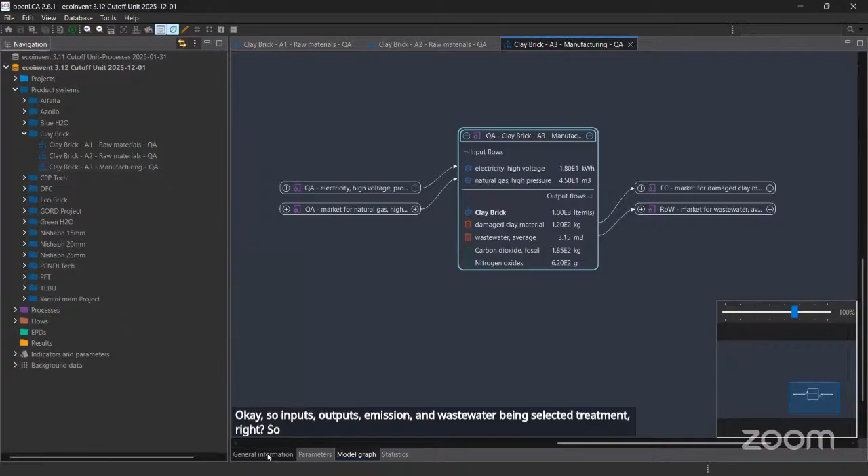Right, so now we can go for the calculation of the full LCA result for individual life cycle stage. I want to do it for A3. Okay, so click calculate, and you will have the option of which assessment method you want to apply.

Right, so if you want to calculate only the carbon footprint, then you choose IPCC 2021. No, I want to do for whole environmental damages, meaning you choose any other option. Okay, so TRACI is meant for America, and European EF 3.1 is meant for the European region. Choose European region and just click finish.

So the LCA is getting conducted, and you will see the result. And the result is only meant for the A3 of the life cycle stage. Okay, so that you should understand.

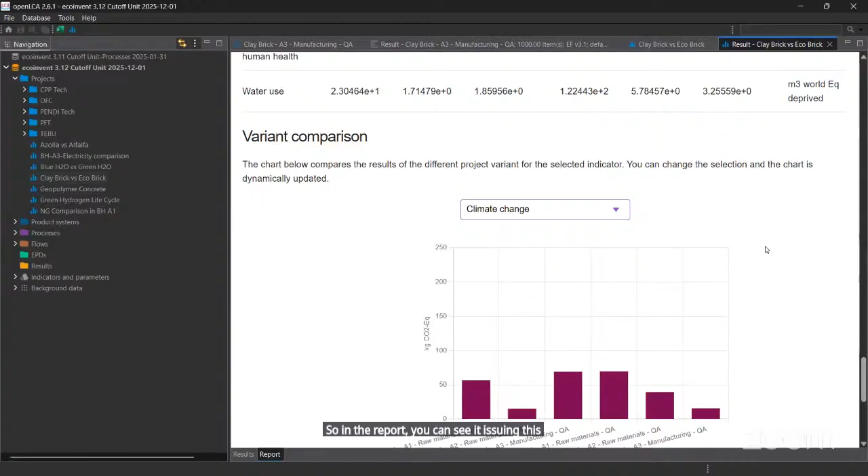So in the report, you can see it visually, the climate change, this is it. So you can see clay brick A1, clay brick A2, clay brick A3, and eco brick A1 into A3, and you can see the full impact category wise result.

Right, so this is how we can perform the life cycle assessment in OpenLCA. I think the time is enough, but still lots and lots of tools are there. Please explore and go. I can share some of the list to your professor so that he can forward it to you and you can explore them on your own.

Okay, so there is a free tool from the same Circular Ecology for concrete mix. For every typical concrete mix, you can perform the carbon measurement. And you can make use of these in your projects, in your research papers, or any of your competitions. You can cultivate your skill of sustainability assessment of construction materials. Okay, you can put it boldly in your resume, right? So that will add lots of value in your job market scenarios.

So finally, if you want to become an LCA expert, okay. No sir, I'm a very beginner.

No matter, I suggest you follow these 3 organizations. Globally speaking, ACLCA, American Center for Life Cycle Assessment, that is the only professional body existing globally, predominantly trustable, American guys. So American Center for Life Cycle Assessment. The second one is Eco Platform, Germany based.

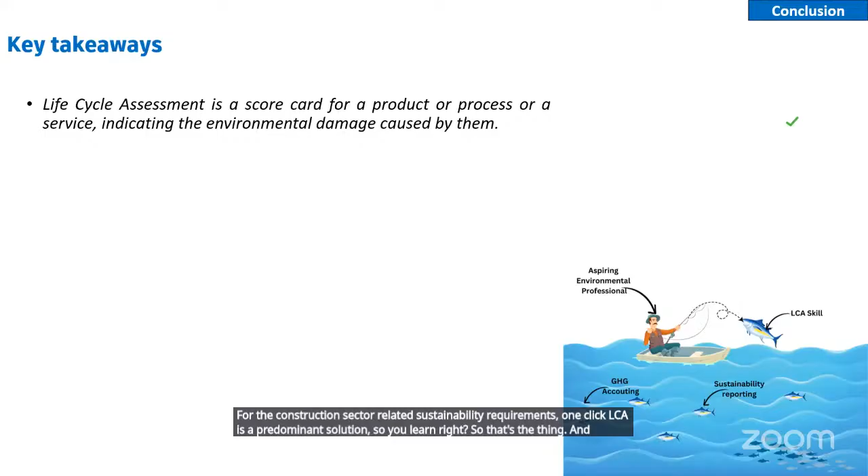Final key takeaways: life cycle assessment is a scorecard for a product, process or service, indicating the environmental damage caused by them. The impacts can be grouped into either carbon centric or covering the full environmental spectrum, the choice is yours. But sometimes people misunderstand or miscommunicate this. They say they want to understand environmental impact but come up with only the carbon footprint, without distinguishing it. They believe environmental impact assessment is carbon assessment, but it's not.

Knowledge of various open source carbon calculators will definitely help fasten your decision-making process by doing a screening activity - this material has this much GWP, that material has that much GWP. Then finally, knowledge of full LCA software like OpenLCA, SimaPro, Gabi, or One Click LCA will definitely help you evaluate the full range of environmental assessment for your given product.

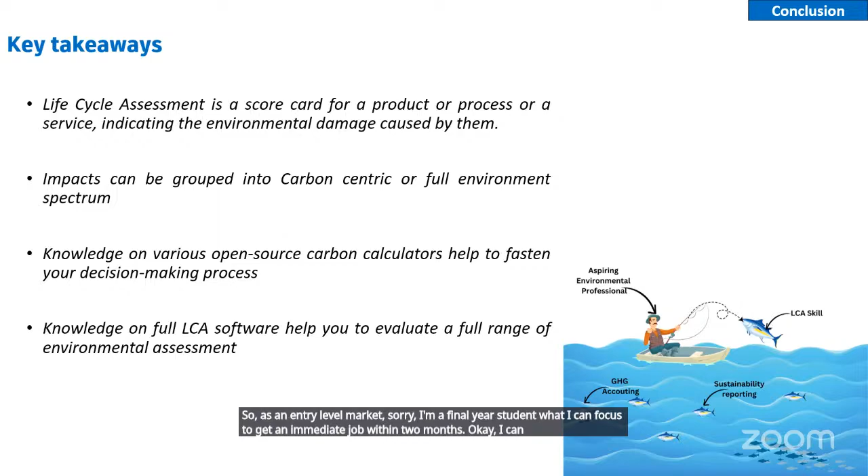So as an entry level, sir, I am a final year student, what can I focus on to get an immediate job within 2 months? I can say that if you complete your UG today and within the next 2 months you want a job, please enroll yourself in the IGBC AP Associate exam. I hope your professors would have spoken about that. Get that and say, this is my identity card.

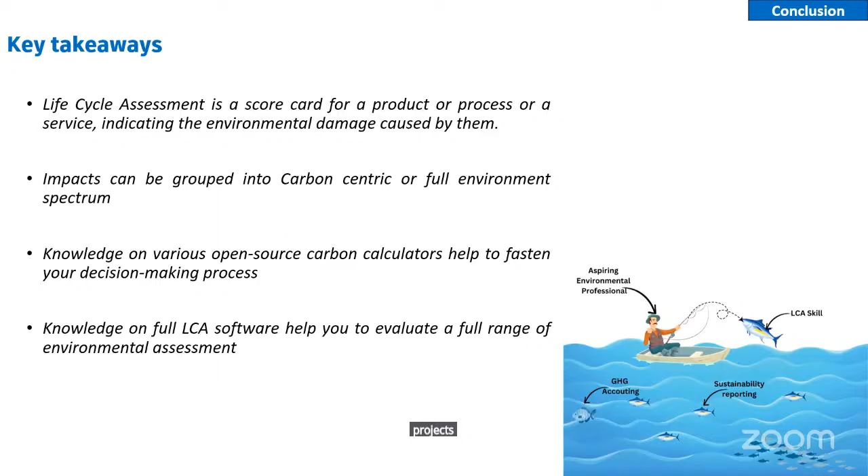And parallelly, please learn about One Click LCA software through the lots of boot camps and online courses in their free academy, it's completely free. Do some self-practice projects and document it. Very importantly, document it. You can use Claude AI for a very quick exercise, I can show this.

I know time is increasing, but please give me 5 minutes. So I trust Claude AI.

You may have any of your favorite AI tools, I'm just randomly asking. I need a data inventory for a building life cycle assessment, and I am going to use Athena Impact Estimator, that is a free tool.

Please generate a simple inventory for a G+1 office building, in HTML. So we say this, and this tool will do the rest of it, and it will take a few moments to generate the inventory that you want.

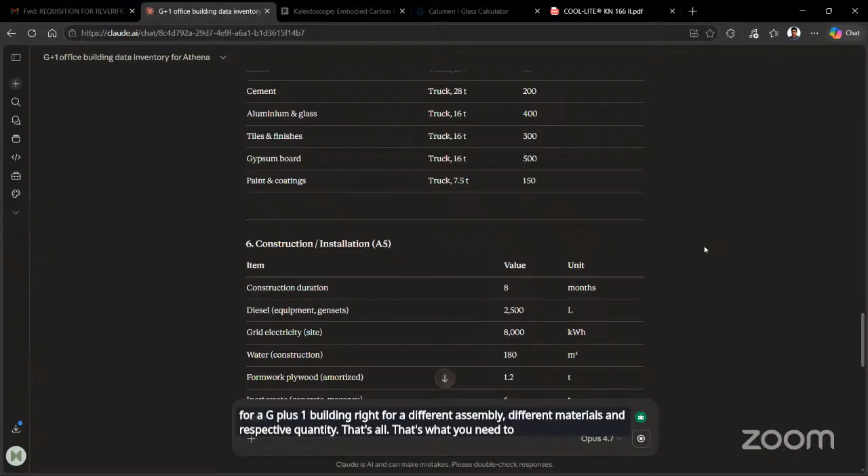And this Claude monthly subscription is around $17, some 2,500 rupees, right? You can spend it for some 6 months until you get your job. Afterwards, you don't need to have a subscription. So this is the inventory I was speaking about. You have the entire inventory for a G+1 building, for different assembly, different materials, and respective quantity. That's all you need to jump into a software. You can copy it from here, put it in the software, and go for the result.